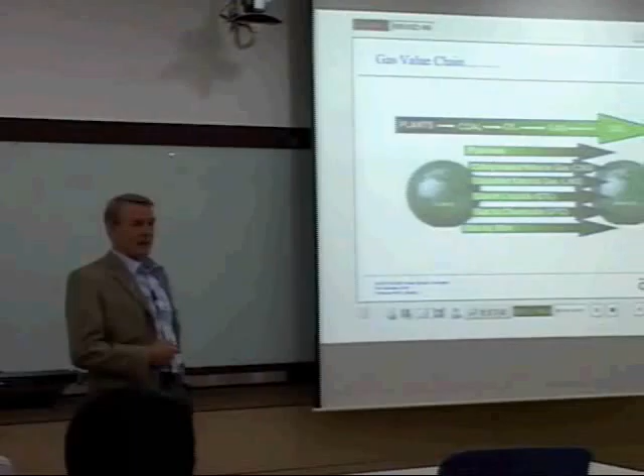the origin of natural gas is plants millions and millions of years ago, which through time and pressure and heat typically would be converted from organic material to coal, to oil, and then gas. And of course, when we use coal, oil, or gas, we'll also produce CO2, which one might say goes back into a cycle with the plants. But of course, the problem is that we produce much more CO2 than what goes into the natural cycle. So that's what we are worried about when it comes to climate.

So there is a supply. There are some wells where one can harvest the natural gas. Then one can transport by pipelines. We can transport in long distances also by compressed natural gas, simply pressurize it. But typically, if you just pressurize at ambient temperature, it will still be a gas, but it can have, let's say, rather high density anyway. Then, of course, a much more used method is to liquefy it by cooling. That's what we call liquefied natural gas.

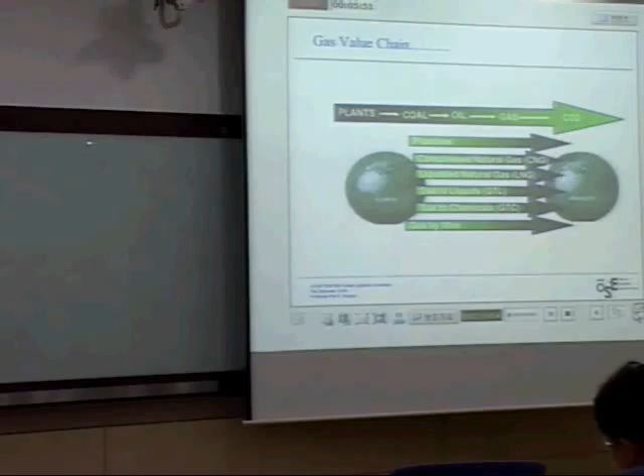Pardon me? Gas to liquids. You can, for instance, make diesel from natural gas, and we'll get a little bit into that. And they're different. You can make methanol from natural gas, plus many other things. It's a very valuable resource. So it's much more valuable than just using the heat energy.

So here, and in one way, it's listed first here because we haven't added much value, but if we take the gas as it is and burn it, for instance, for heating, we need to heat our houses, then of course we utilize that gas directly. So that's what's called gas to flare.

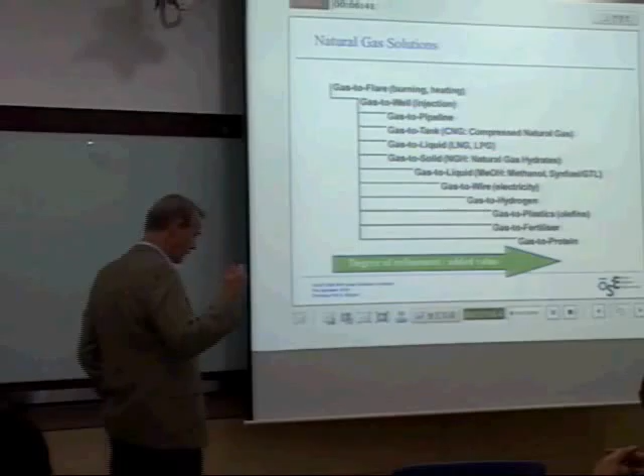You may also think of having seen pictures from countries where they primarily produce oil, and you may see these towers with a big burning flame on top, and that's what's called flaring. And in many countries now that is not allowed because it's a real waste of energy, right? But of course, if there's no way of dealing with the gas at the site, where, let's say, the main production is oil, but when you pump up the oil, there's also gas coming up, then some places they do flare it, they burn it.

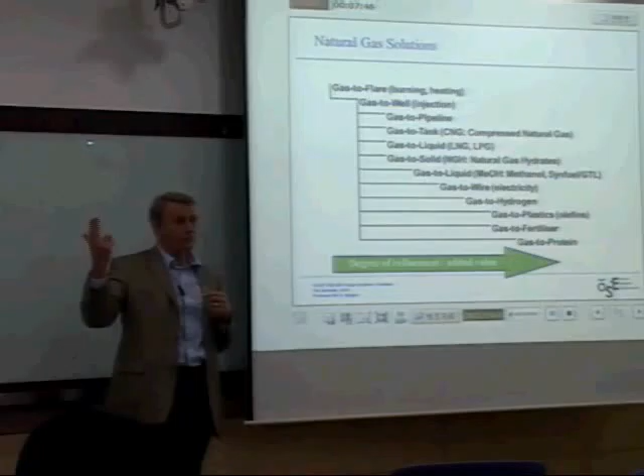Also at offshore platforms you can see that they have a flare, but that is for safety reasons. If for some reason a too high pressure would build up in the processing system, for safety reasons, one would flare it, burn it, right? But it's a waste of energy.

Also, gas to well. In some cases you have a production schedule for a well. Let's say you have both oil and gas in the reservoir. Very often, you'll find a layer of oil, and on top of it, there's a layer of gas. But the problem is, and let's say this is the surface or the sea bottom, if you take out the gas first, then you lose the pressure that you need for the oil, right? So they would like to extract the oil first,

but you may get gas coming up through the pipeline, and you are afraid of losing the pressure for the oil, and therefore the gas is separated out and then put back in the reservoir. But normally, after some years, one would like to produce the gas. So, in one way, it has a value to maintain the pressure in the reservoir. And that's particularly when you have both oil and gas.

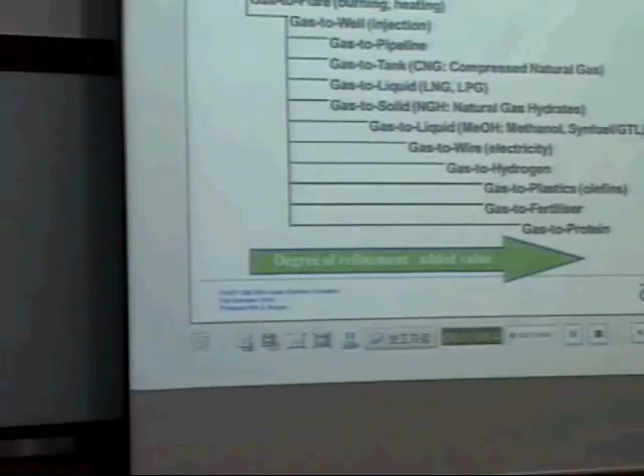So CNG is at ambient temperature. It is at natural temperature, but it's compressed. So of course, if you're going to transport it, you would like to transport as much as possible, and the amount you transport is dependent on how much pressure you have. So, for instance, you may want to transport natural gas by compressing it to 200 bars.

And you need a lot of steel to do that, to have huge volumes of gas pressurized to 200 bars. Gas to liquids, liquid natural gas, and of course also the heavy components of natural gas, butane or propane. Gas to solids, natural gas hydrates. What's a hydrate?

Hydro, water, right? So you have a method of mixing water and gas, and then you can get the gas out again by heating the hydrates. In nature, there are natural hydrates as well in the sea at very, very great depths of water. There's a lot of interest these days in the natural hydrates. Maybe that could be a source for energy in the future. But we can also make it. We can make a hydrate.

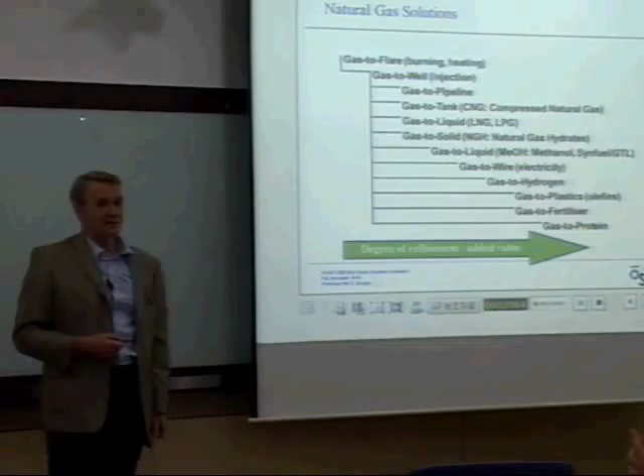So with modern chemistry, you can sort of split the molecules, take them apart, and then put them into different new configurations. Of course, there's an energy part of that equation, and it's not always very smart to do so, but you have a lot of flexibility with modern chemistry in making new things. And of course, carbon, oxygen, and hydrogen are major components in these products. So putting these atoms together in various ways, we can make different products.

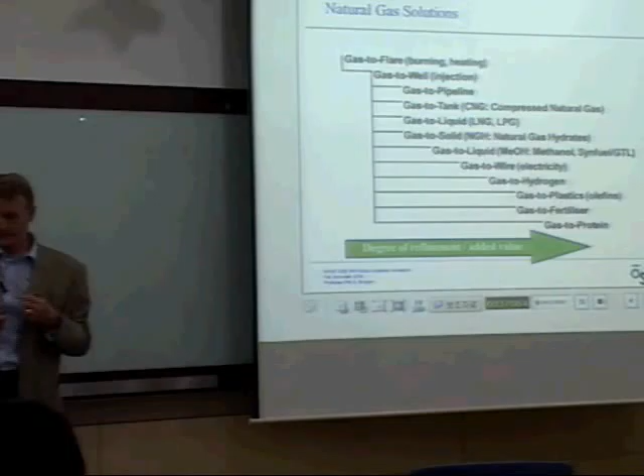So for instance, if you have natural gas coming in from a well, you can make methanol, you can make hydrogen, you can make synthetic gas and get some CO2 that you should take care of. You can get ammonia, also called azane, NH3. And then we're talking about this link into fertilizers, right? Nitrogen compounds.

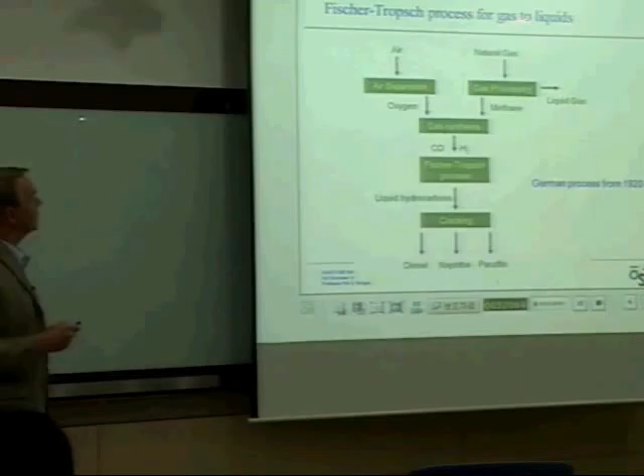So let's just take the gas to liquids. What's the advantage of transforming a gas into a liquid? It's easy to transport, right? You just put it in a bucket. No pressure, no cooling, and that's what we call fuels. So we would like to have it in liquid form. Unfortunately, to get it into the liquid form, we need to add energy.

But for instance, during the Second World War, Germany had a lack of fuel for their operations, and they made a lot of diesel and fuel for their war machinery, starting with coal, because Germany had a lot of coal but didn't have any oil or gas. But one can use coal, or one can use gas.

And natural gas very often is about 80% methane, right? You know what methane is? It's a high hydrogen fuel. It's a low carbon fuel, right? CH4. Okay? So you have a natural gas with different chemical components, and then you sort out the heavy parts, like butane and propane and that sort of thing, and the methane, the lightest component.

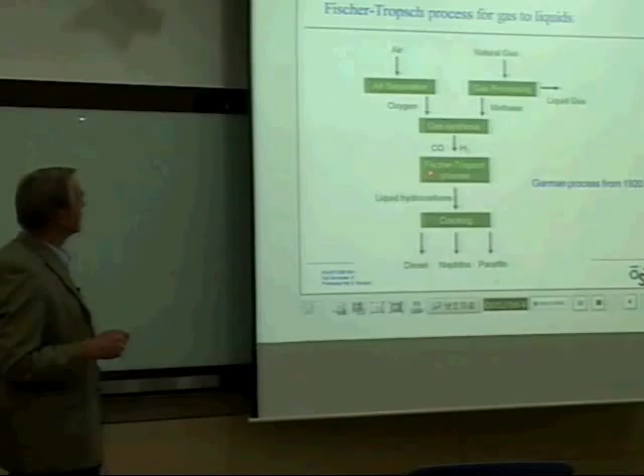You get into this gas process where you get oxygen from air, for instance, by, what do you call it, electrolysis, and then you do a synthesis and get hydrogen and carbon monoxide, and what's called the Fischer-Tropsch process, which is a German process from the 1920s. You can make liquid hydrocarbons, diesel, naphtha, paraffin.

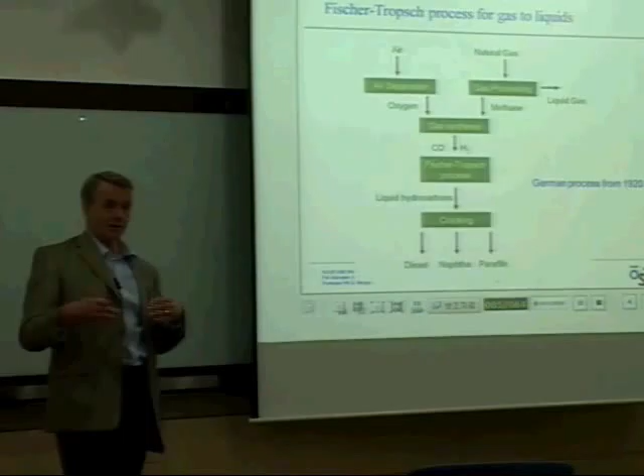And that is one source. But as I said, you need to add energy. And normally, it's maybe better to use the natural gas in other ways, but this is certainly a possibility. Let's think in the future, for instance, if we ran out of oil but still had gas. Well, we would like to have fuel for our cars and other purposes. Then we could make diesel this way. And it is being done, particularly in situations of crisis.

Okay, so that's some of the background. Now we would like to talk about marine transportation. And we already have covered subsea pipelines, right? Then we have compressed natural gas, we have liquid natural gas, we have gas to liquids.

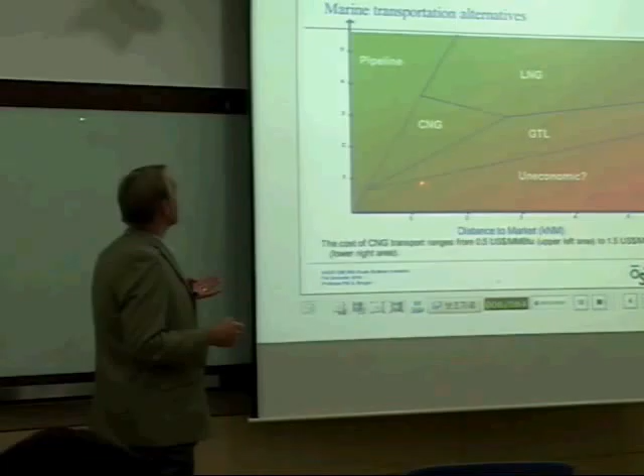And distance and cost per unit is drawn here, and you see if the market distance is very long, then there are certain, it's very... I'm just wondering now, this axis, the cost of CNG transport.

Okay, well, it's more the investment cost here that goes here. So if the investment cost is rather high, and then of course also the added cost of distance, if that is also high. For instance, a pipeline is typically proportional to the distance you want to transport. So the pipeline becomes too expensive if the distance to the market is too long.

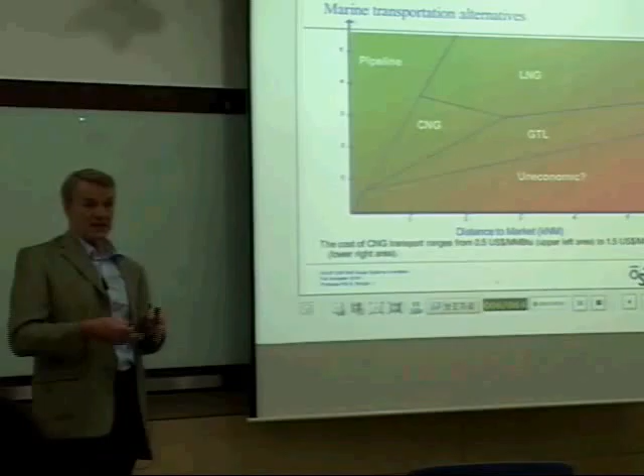Whereas LNG, the cost you put into the LNG is primarily in the chemical processing, the cooling. It doesn't really matter how far that ship is going, because the ship transportation is very cheap, right? But there is a basic investment which is rather costly, so it doesn't make sense to do an LNG transformation if the distance is short. It's only when the distance is long that LNG is competitive.

But if you have a rather short distance, an alternative to pipeline could also be to compress the gas, because compressing is not quite as expensive as liquefying the gas. But the transport per length is more expensive with CNG.

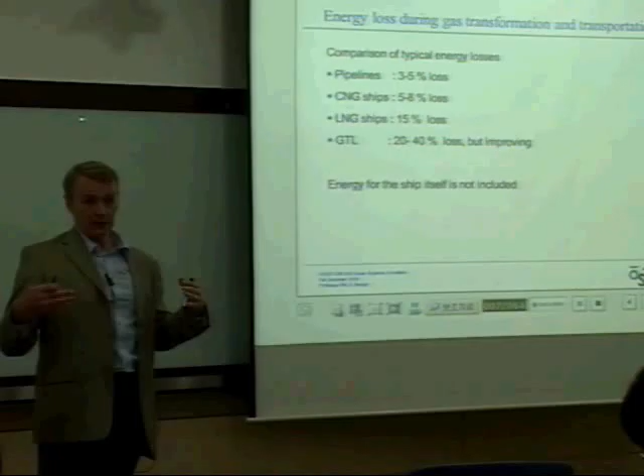And also when you think about the energy loss, the energy cost of transporting in a pipeline has to do with the friction in the pipeline, right? You have to add pressure to get the gas through, and the speed depends on the pressure difference at the inflow and the outflow point. So you need energy to overcome the resistance, the friction in the tube. So if you have a very long pipeline, the loss will be higher than for a short pipeline.

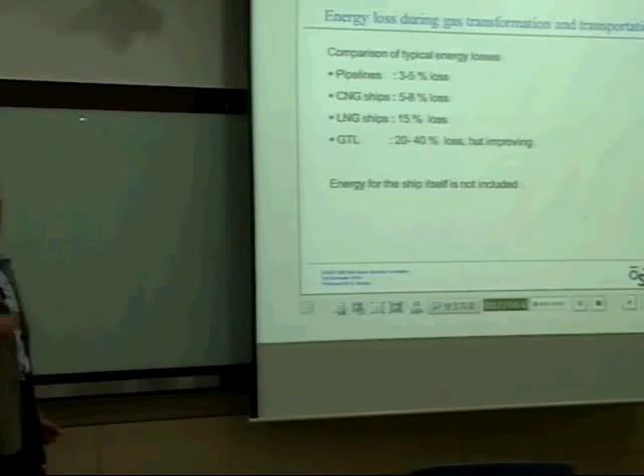With CNG, the pressurization also implies you have to add energy, right? And you can say that about 5 to 8% of the energy content in the gas is lost by having to add this energy. And for LNG, the cooling is even more expensive. Then the cost is about 15% in terms of energy. You have to use more energy to cool it than to pressurize.

And gas to liquids, that is very demanding when it comes to these chemical processes, where you may have to have electrolysis and you may have to add additional energy. So one is talking about 20, 30, 40%. So that is the process cost in terms of energy.

So we have gas production at the well, liquefaction, we have shipping. When you come with the LNG ship, of course you have to heat up the liquid gas in order to put it into pipelines and transport it to the consumer or to the industry that's going to use the gas. Normally that energy is taken from the sea, so it's not a very costly energy. Typically these regasification terminals, and you have several of them in Korea, take the energy from the sea that is needed to heat up the gas.

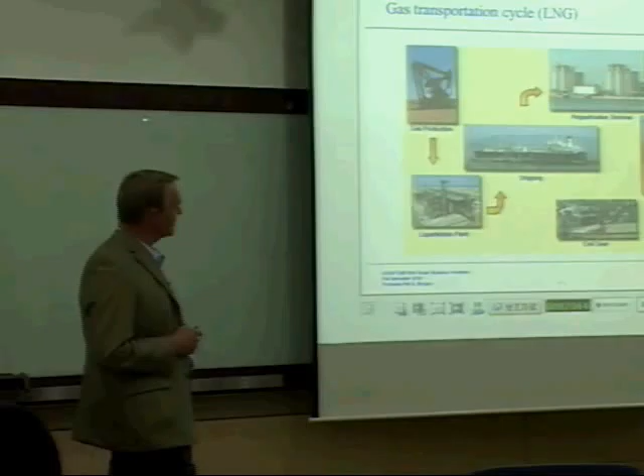But do you see some strange things in this picture? Something that is not really right. I'll start here. This is an oil pump, isn't it? Right? So you have to be a little bit critical. I don't think this is a gas pipeline from a regasification terminal either. It looks like it's from a certain field. But anyway.

I won't go too much into this phase diagram for natural gas, but you can go between liquid and gas, to gas, and of course a pure liquid. And if you have atmospheric pressure, then you have to cool it a lot, to minus 162 degrees or colder, in order to make it liquid. So 162, 163, in that range is where methane, which is the lightest component of natural gas, becomes a liquid.

And when the gas is at minus 162, it's a liquid at the boiling point, right? It's really a boiling point. We think of water, right? When it goes from water to steam, that's at the boiling point. But liquid natural gas is at the boiling point at minus 162. And the shifting between the liquid form and the gas form is very close.

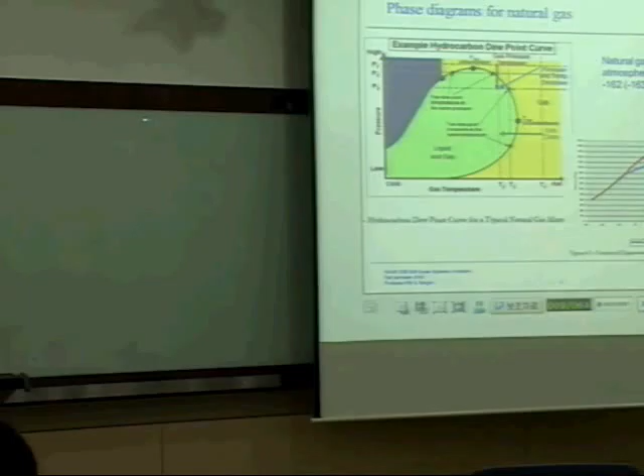And of course, in an LNG tank, you have both a liquid, and above the liquid you have an area where you have the gas form of the natural gas. But that gas, which is also around minus 162, is a very heavy gas. Very heavy, relatively speaking.

So when you get the gas from, it says transportation here, I would say the pipeline from the well, then you remove the heavy components, you remove CO2 that often comes along, you remove water, and you also remove other compounds that may come along, like mercury, certainly, and sulfur, hydrogen sulfide components. You don't want those in the transportation system.

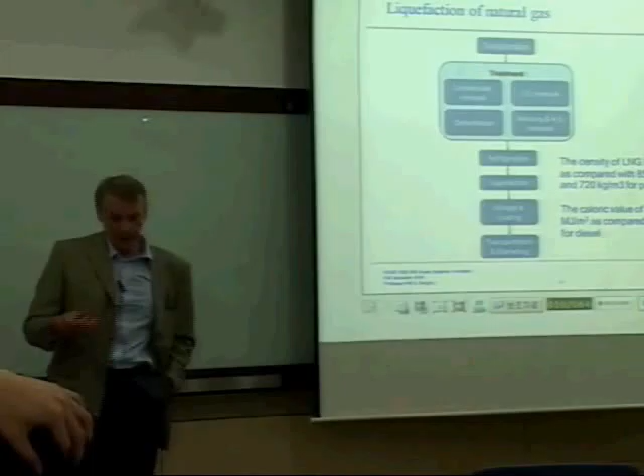So that kind of cleaning has to be done for the gas before it's refrigerated and thereby becomes a liquid, and you need storage, and then you get it onto the ship and transport it to where you want to go.

And you see, the density of LNG is less than half the weight of water, right? So it's really a light cargo. So what you would like to have on an LNG ship is huge tanks. You don't want to waste space because your cargo is light, right? So tank efficiency is important. Okay?

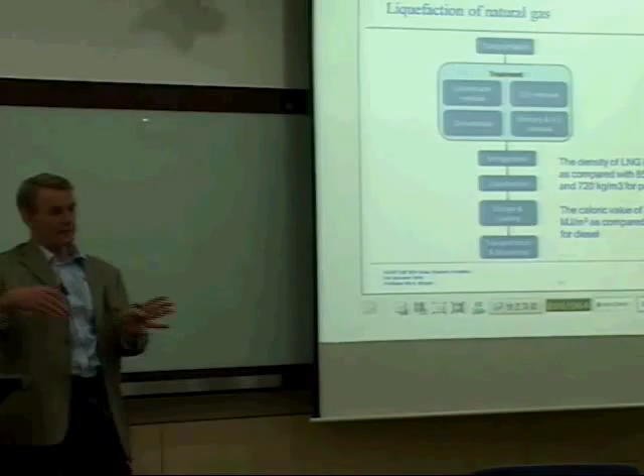So if you compare with diesel, you see it's much lighter. And also the caloric value, the burning value of LNG, when it comes to how much energy you have per cubic meter, that is, how much energy do you transport on a 200,000 cubic meter storage on the ship? Well, it's less energy if you have LNG compared with diesel or oil, other types of fuel, right?

But anyway, gas transport is very important, and gas is a much cleaner fuel than, for instance, crude oil, right? So there are many reasons for doing exactly that. These are just a repetition about the market, how it's now developing around the Pacific Basin, the LNG demand, and then the Atlantic Basin, and also a lot of growth there.

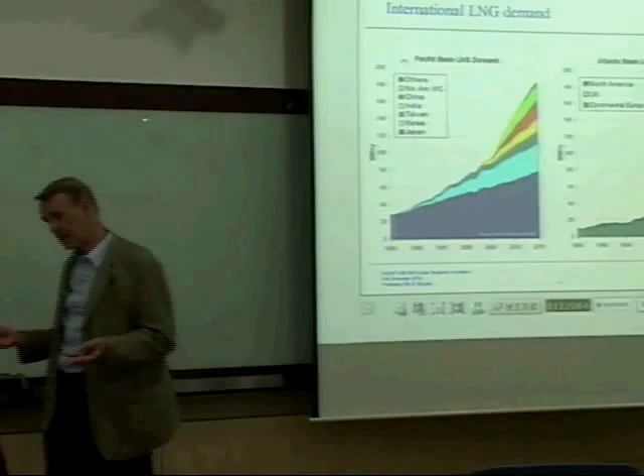But as I mentioned, there is one uncertainty factor these days, and that is what's called the shale gas, right? What the Americans are doing with the shale gas, which they have a lot of, which is not a really good source because the process of getting the shale gas out of the ground is polluting. But for strategic reasons, and that is the United States' energy dependence from importing energy, right? That is a problem for that country. That's why they're pushing this shale gas. And the market is a little bit nervous about this development. But anyway, the gas market is certainly increasing, and increasing rather rapidly.

Of course, what is a little bit uncertain is if these older ships will be phased out when they are 30 years. They are probably a little bit less efficient in many ways, but the investment cost of a new LNG ship is very high. Depending on the size, we could talk about $500 million. They can be very expensive, these LNG ships. So it's a matter of economy as well as safety. And also economy of scale we talked about, and now the focus is on the big stuff, the large tanks, and how can they be made.

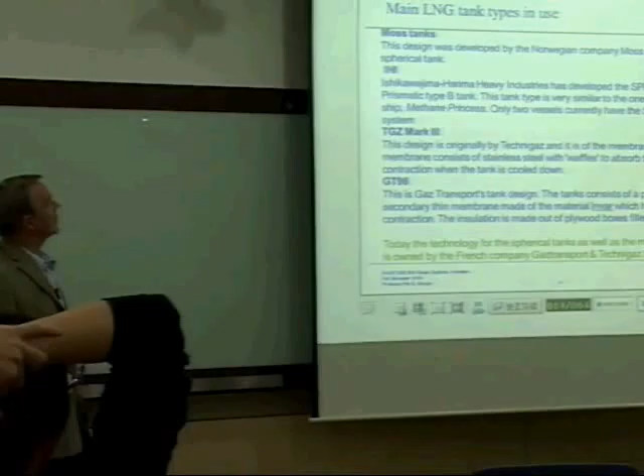So we'll spend some time now talking about the main types of tanks for LNG. And the LNG history goes back to the 60s, I think the late 50s. So it's a pretty long history in one way. But the first tanks that were built on a large scale, those were the spherical tanks, a design by Moss Marine in Norway. So about 50% of all the LNG ships in the world are with these types of spherical tanks, and we'll look into how they are designed.

Then there is a Japanese, I won't pronounce it, but IHI. So they have a self-supporting prismatic tank, and we'll talk about different tank shapes. A prismatic tank, it's like a box tank. And a box is more efficient than a sphere when it comes to utilizing volume, right? When you put spheres next to each other, you have a lot of space in between. Whereas if you have a box type structure, you can pack things much better together.

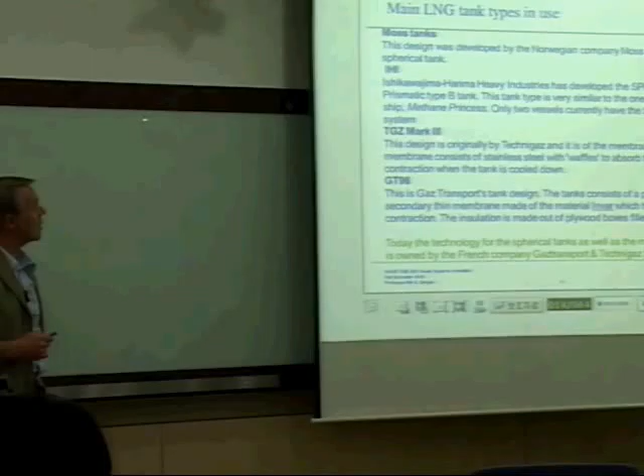But this hasn't been a very great success. So only 2 vessels have been built by this system, whereas here we are talking about dozens, probably more than 100. And here you have 2 types of membrane type tanks. One is called Technigaz Mark III. Now it's only referred to as Mark III.

And the other one is Gaz Transport, which is using another type of membrane tank, where the primary barrier is Invar, which is a metal which doesn't have any thermal expansion and contraction. Because you understand that temperature is a very difficult part of the design. When you cool something down nearly 200 degrees, from room temperature to minus 160 something, then of course you have a huge thermal contraction.

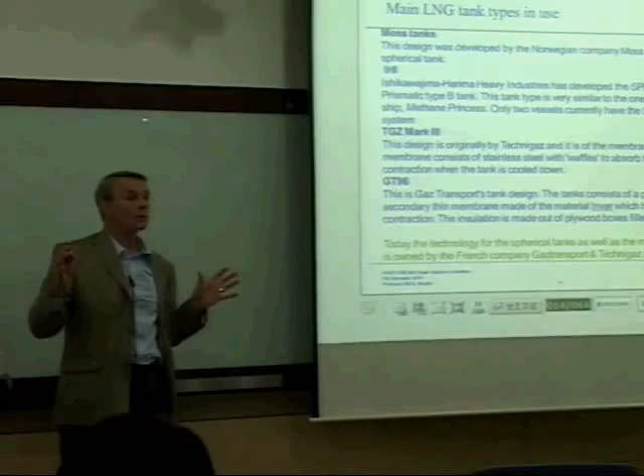And that is a real design challenge. And what has happened? Well, there's a company called Technigaz and Gaz Transport combined, GTT, that is controlling all this technology. Of course, many of the old patents have gone beyond their protection time, so they are open. But there's a lot of technology in addition to what is in the patents. So this company is more or less controlling all the LNG tank systems.

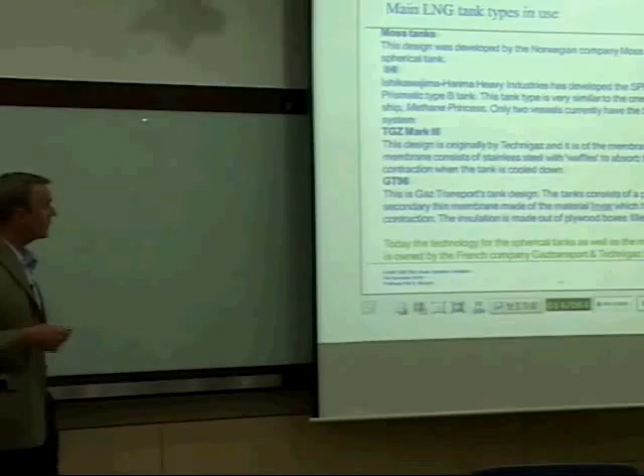And of course, I'm sure the Korean yards, as well as many other yards, are not very happy with this monopoly type situation. And I know Korean shipbuilding industry has been very much interested in developing a Korean concept for LNG. Right? So far, it has not happened, but I'm sure it can happen. And I think certainly there are alternatives that really could be competitive today to these existing systems. So this is quite an important topic.

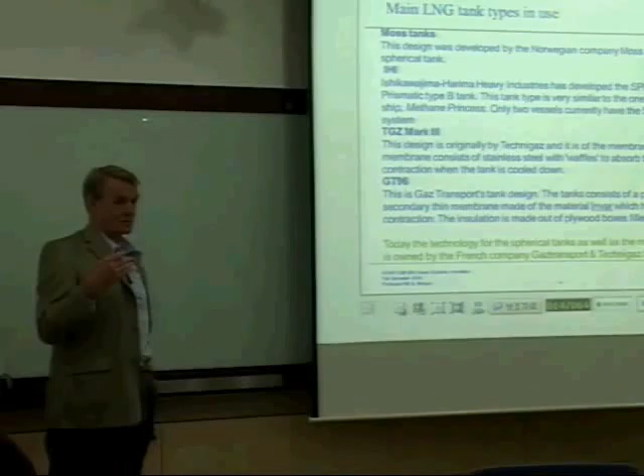And for instance, GTT, I've heard about what kind of fees they are taking for consulting. Fantastic prices they can charge for their technology. For one ship, the license may be in the order of $5 to $10 million just for getting access to the technology. So you can understand that the Korean shipyards are not too happy to have to pay so much for this technology. And additionally, possibly also consulting fees to the engineers from GTT.

But when the tank contracts, because it's getting cold, right? Then of course this has to deform. So you do get some thermal stresses in that structure.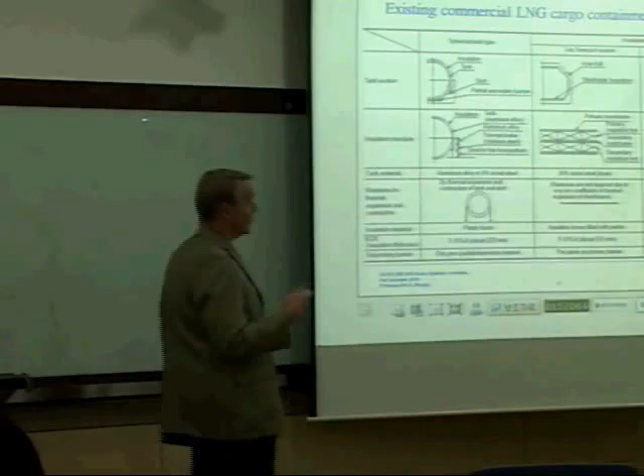And then you insulate the tank on the outside, and you have what is called a drip pan. If there is a crack in the tank, the liquid will flow down here and be collected in a drip pan here. But of course, by all means, you don't want that to happen. But there are gas detection systems that will discover if you have a crack and a leak in the tank. Okay? And the design criterion is leak before failure.

What does that mean? Well, if it should happen that you have a crack in the tank, that crack should not become brittle and you have a brittle failure, because then of course you'll have a catastrophe if the whole tank breaks down. But if the crack just opens and lets out a little bit of gas, you'll detect that there's a defect or a small crack in the structure. The rule is that the ship should be able to go to shore and unload the cargo before the crack becomes unstable.

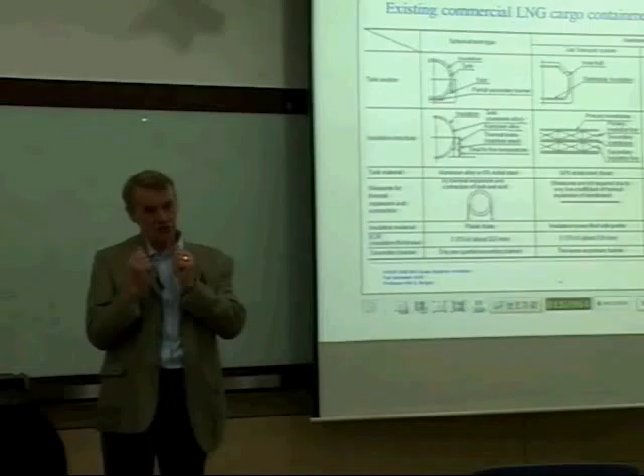You understand this? So leaking, of course, should not happen, but if it happens, the material has to be so tough that with the crack and with the liquid coming out, it still should not become a brittle fracture failure, right?

So important things to consider. I already mentioned this, structural integrity of the tanks, the failure mechanisms. You should not have brittle failure. You should not have a large crack opening. And if something is wrong, you have a strategy to ensure that you don't have a total failure before you can get to shore and have repairs.

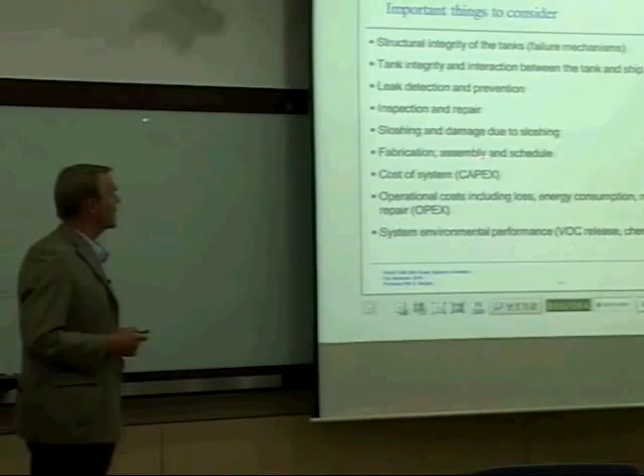Fabrication schedule. How long does it take to build such a ship? You know, the capital cost, if it's a ship that costs many hundreds of millions of dollars, what do you think it costs per day to have it without getting into operation? It's really scary if you start looking at that. And of course, the schedule, when you first start pouring money into building a ship, it's very important that you do that very quickly. And of course, that is a competitive advantage in many cases for Korea, because you are very efficient at manufacturing, right?

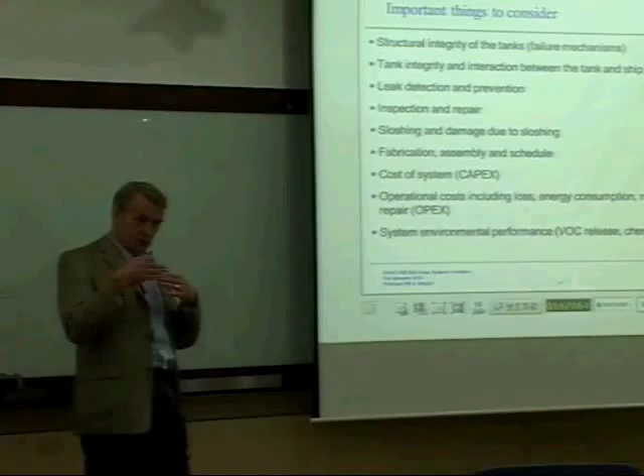So it's the cost and operational expenses, and also for the entire system, the environmental performance, which is becoming more and more important. So it's volatile organic compounds, volatile fumes coming out, but nowadays one is much more efficient and has systems for taking care of the vapor.

Remember that liquid natural gas is at the boiling point, and there's no active cooling system of the tanks themselves. The cooling is actually from vaporization, from fluid to gas. That's how the cooling takes place. And of course, when it goes from fluid to gas, it expands, and you cannot have this pressure building up inside the tank. So you have to release that. Well, nowadays, those fumes are cooled and put back into the tank after being condensed again. So you actually use energy to make it cold again, right?

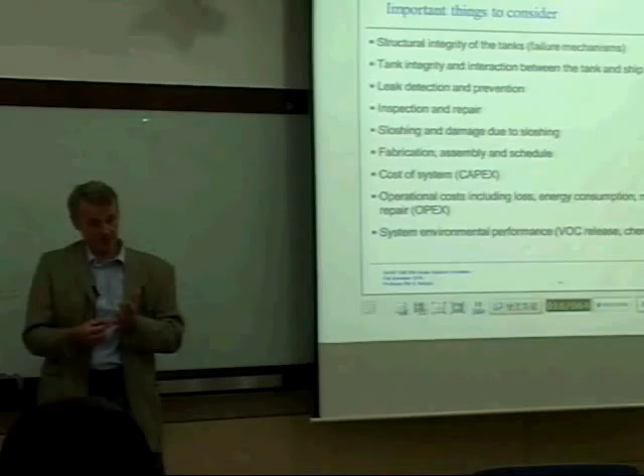Or in some cases, one can use the vaporized LNG as a part of the fuel for the ship. For instance, if you have a combined engine that can burn both LNG and diesel. Okay? But of course, you have to have some kind of agreement with the owner of the cargo. I mean, the ship owner cannot just steal the cargo. This has to be a part of the equation, right?

But you see, in one way, these spherical tanks don't fit very well into the ship hull. And the way the fees are decided when you go through the Suez Canal, this is an additional cost of having the spherical tanks. They have to pay much higher fees for going through the Suez Canal than the membrane tanks, and that's because of the volume above the sea.

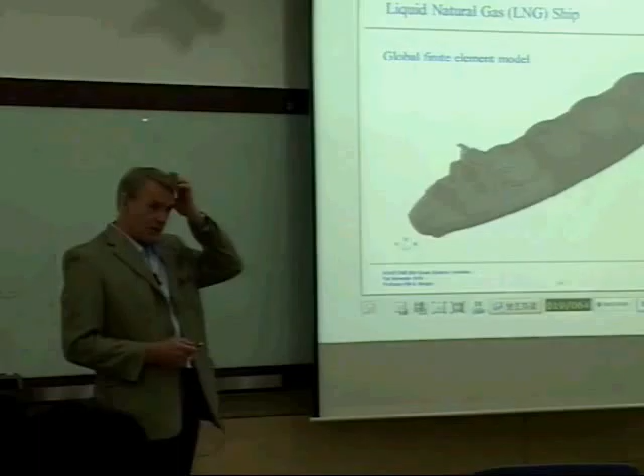Some of you are taking the finite element course. I'm just showing you an example of a real problem. I'm not sure how many real problems you see in that course, but this is an example of a finite element analysis of an LNG ship with this Moss spherical tank concept.

So when you start looking more into detail, you can see that a finite element model is built from what is often referred to as substructures or super elements, that is, elements consisting of many other elements, and you can build parts on different levels by putting together parts of a lower order, right? So, for instance, you have a detail here, a very important one, having to do with the support of the sphere, and you have a very detailed model here. You have the lower part, you have the upper part of the shell.

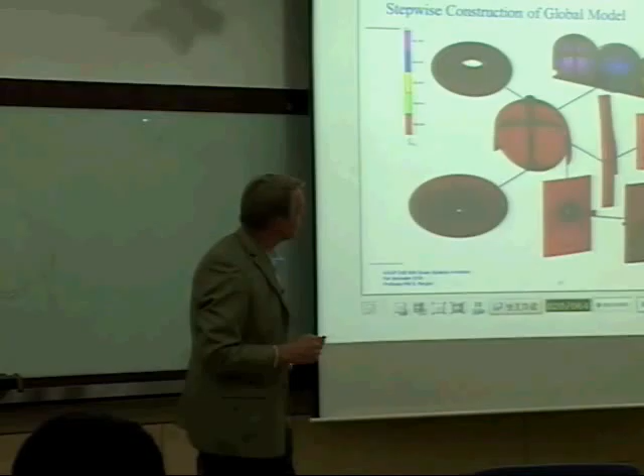Here's even more fine detail, where you use very, very small elements to get the stress concentration where you have the support, right? The elements may be millimeters. And then, on the other hand, you have a ship that is 200-300 meters long. So you see the complexity of this. You want to do detailed analysis at the local level because you're interested in stress concentrations and fracture. And at the same time, you want to look at the interaction between the ship and the tanks, right?

So it's a very complex analysis, but you can do a part solution and a condensation where you put together these elements, so you don't have to solve everything at the same time. But anyway, if you look at the number of finite elements in a model like this, we are talking about hundreds of thousands and millions of degrees of freedom. But this is a standard type of analysis that can be done today with large computers, but still, it's a standard analysis.

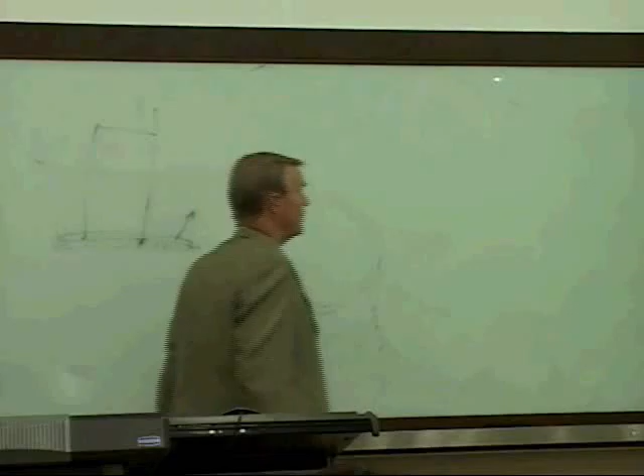So we have finished the spherical tanks. Now we are getting more into the membrane tanks. I have quite a few slides, and I'm not going to go through all the slides, but since I have it, I would like to give you some more background information. So some of these figures you can look at yourself and see if there's information there that would interest you.

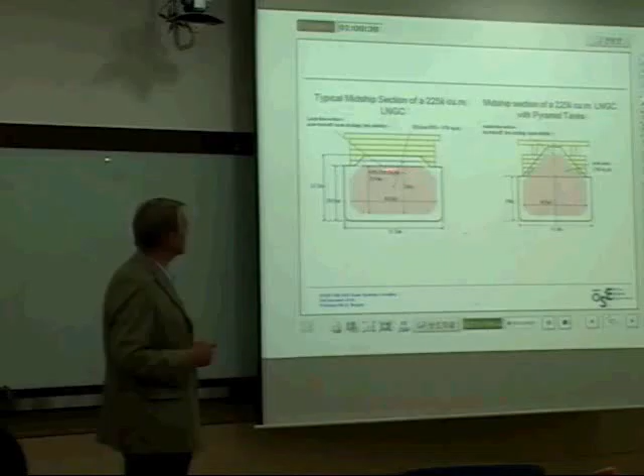Here is a large LNG ship. You see some typical sizes of these tanks. Total height 26 meters, width 44 meters. And of course these tanks don't go all the way out to the side. And why is that? Well, if you have a collision, you have to have maybe 4 meters, 5 meters as a safety zone, because you don't want that other ship to penetrate and open up the membrane tank on the inside, and that tank is not very strong, it's just a very thin material.

So, the cargo is light, and someone would like to have larger volumes, and these are some of the recent proposals to at least get a little bit more space on board by extending the tank like this. But of course you also build up higher pressures inside the tank, right?

And I would think that one other consequence is that you have to pay higher fees in the Suez Canal. Here are some of the figures that you can look at yourself.

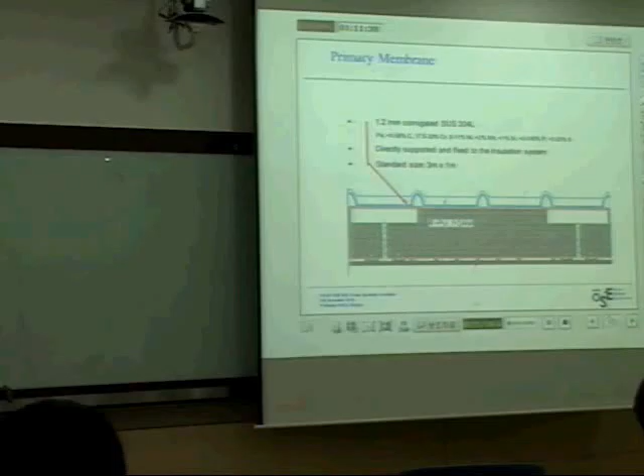So some of the details here with the secondary membrane and the corrugated top layer, right? It has to be corrugated in both directions because, of course, you have contraction in both directions. More details: the thermal insulation, glass fiber reinforced insulation, and what's called a triplex membrane, which is the secondary.

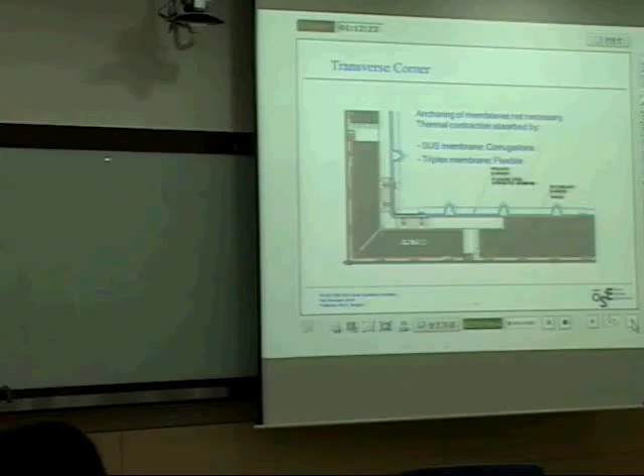And in between here you have gas detection systems. If you have a leak, the idea is that it's going to be detected before really getting through the second membrane, because if that happens, it's bad news. Some more detailing. How it's attached to the ship structure, bolted. So there's a lot of handwork, so to speak, here.

More details about the membrane. Welding. Lots of welding. Look at this. This is one of the corners. You see these welds? In rather critical areas. So I'm sure the people who do that welding have to do a lot of training.

And of course, after the tank has been made, it has to be tested, normally by applying some overpressure between the internal and the... Is it overpressure or under pressure? Maybe it's under pressure. I'm not sure. But anyway, there are some pressure tests to see if it's leaking or not.

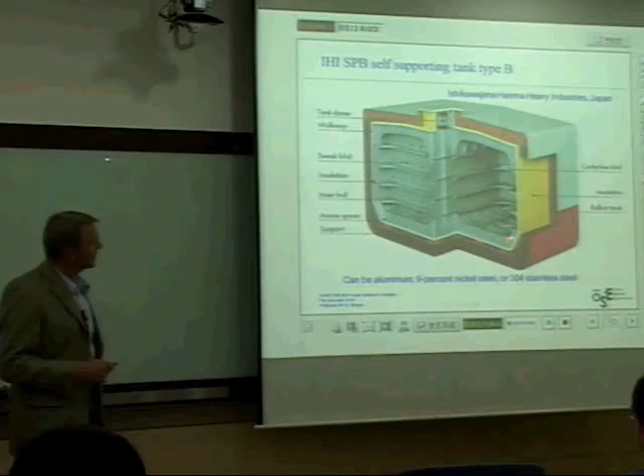This is the IHI tank, right? It has only a single barrier, and it's like almost any other ship tank, quite much welding work to do here, and rather heavy. Supported on blocks, and of course this contracts too. So it's self-supporting, really a separate tank from the ship structure. But of course the bottom of the ship structure will also move somewhat, so that kind of deformation has to be allowed for.

And there are some ships that have combined tank systems that can handle different types of gases. Ice-breaking LNG ships. See this one? Ice-breaking bow. We'll get more into this principle of ice-breaking later on, but it presses down the ice, fractures it, and pushes the ice to the sides. So in principle, this one can go through 1.5 meter thick ice. So not a very large LNG tanker, but still, 70,000 tons.

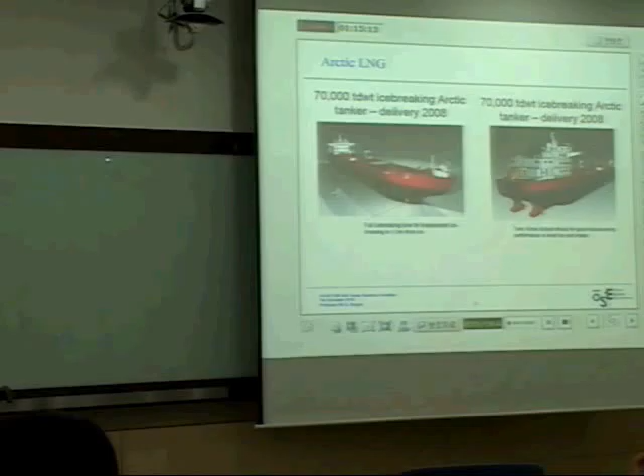And of course, some of these new gas fields are in Arctic areas. So is this safe? There have been a good deal of accidents, groundings, collisions, spills, engine fires, not major consequences. LNG is lighter than water, and natural gas is lighter than air. It will tend to evaporate into a cloud. So methane gas is lighter than air, so it will go up.

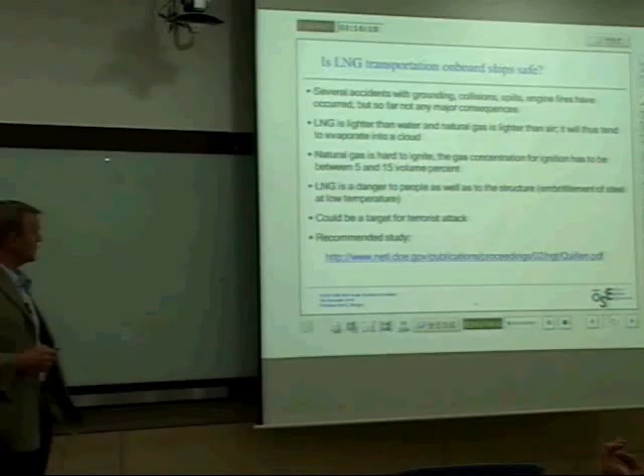But if it comes out as a liquid, that liquid will spread on the surface of the water, right? But it's not that easy to ignite. You have to have the right mix of air and natural gas in order to be able to ignite it, so that's between 5 and 15 volume percent. But it's dangerous to people, of course. You'll suffocate if you're only breathing methane, and it's terribly cold. And for the structure, I talked about the temperature problem and the brittle behavior at low temperatures.

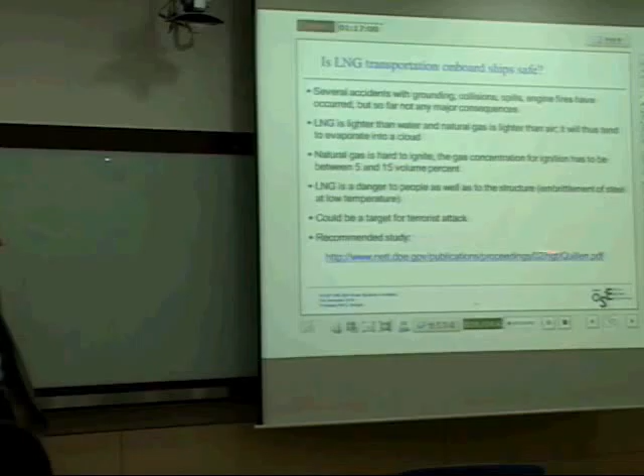A ship of this type could be a target for a terrorist attack. One saying is that an LNG ship is like a small atom bomb. Well, it's not that easy to make it blow up, fortunately. But we don't really know what will happen. But there are some studies of the safety and security relating to LNG ships, and there's a reference.

Land tanks, I'm not going to talk about land tanks, but they are, of course, important in connection with terminals, and in principle you could build such a tank also on a floating structure like a floating terminal, but the land type of tanks are normally very heavy. They are concrete outer shells, and then they have an inner tank which is made of 9% nickel steel. The same as you see on the ships.

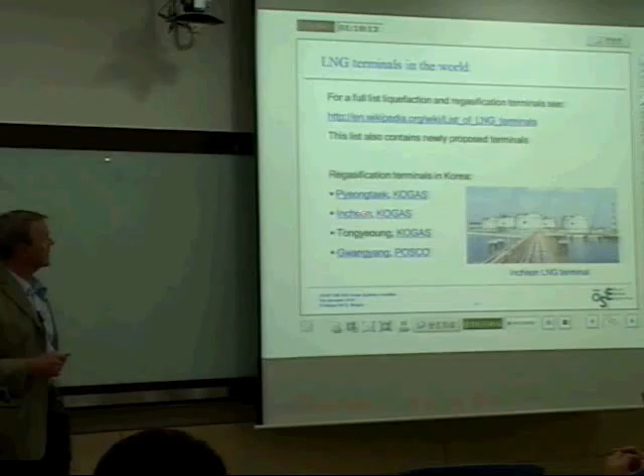So in Korea, of course, there are no liquefying terminals because you don't have any source of natural gas, but you have the regasification terminals. So there are some of them and some very large ones. I think at Incheon there are more than 20 different LNG tanks. Different sizes. Big. Big stuff.

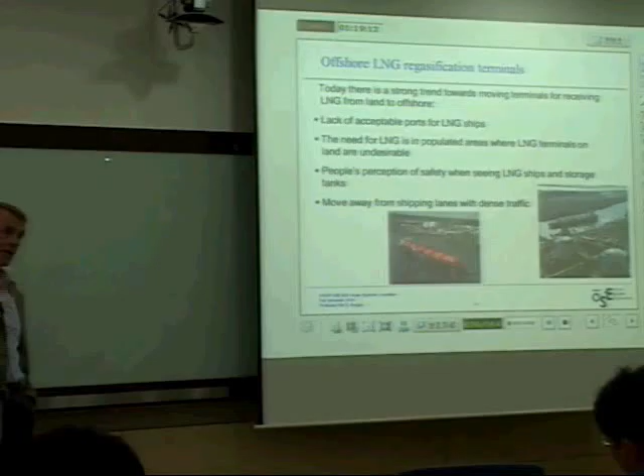So, again, the kind of technology we are interested in, which is the offshore floating plants, regasification plants, etc. That's the kind of technology that is coming more and more and becoming very crucial. So a floating LNG plant can be moved to almost any location. It typically can look like a process ship. No pipelines to shore needed.

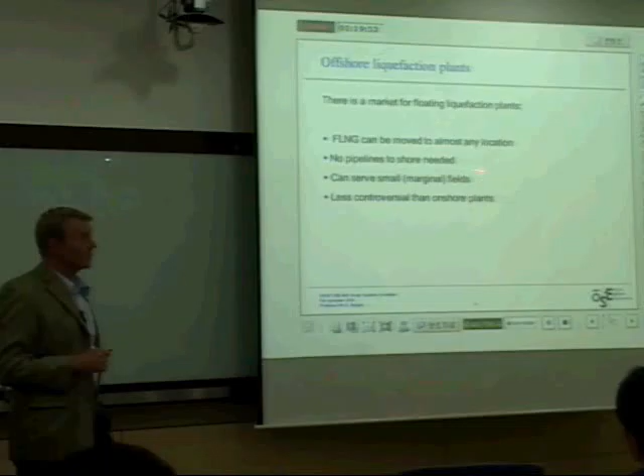Can serve smaller fields. Smaller fields that produce maybe 5 to 10 years. And when it's empty, you can move the ship to another place, right? So the investment cost can be shared by several fields, and it's less controversial than onshore plants. And that is particularly in the United States. There's been a lot of resistance against LNG terminals. For instance, the west coast of the United States needs a lot of gas, but they don't want the terminals. They would rather build terminals in Mexico and send it up to the United States.

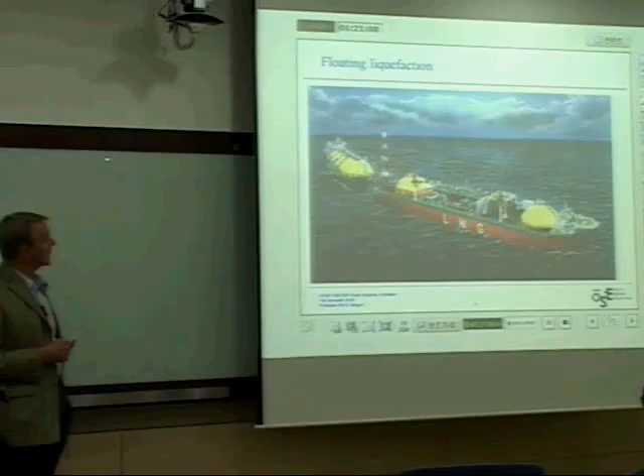But this is what it may look like. You have an LNG liquefaction plant, right? So there's a gas well down here, a resource offshore. There you have some tanks on board, and then this LNG ship comes in and gets filled with liquid natural gas. And here you see spherical tanks where the problem with partial filling is not significant, because the tank itself is much more robust, and sloshing is less of a problem in a tank like that, because the local buildup of pressures is much smaller. So different types of tanks could be used for such liquefaction terminals.

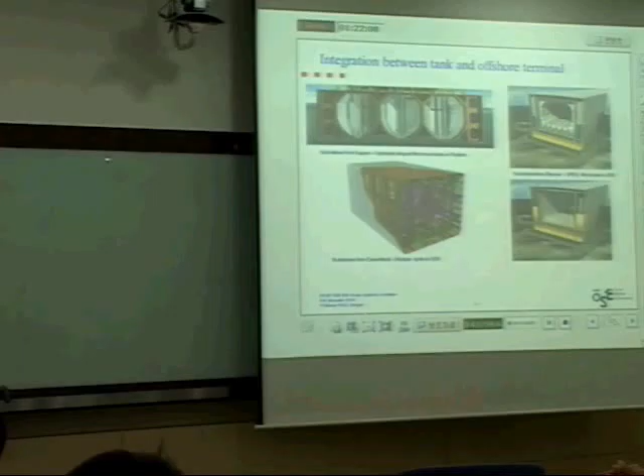Here you see some ideas. And of course, prismatic tanks have the advantage of being better integrated into the structure. The prismatic, the box-like form. And here's one concept that ExxonMobil worked on for many years and invested a lot of money into, and finally implemented in an offshore terminal in Italy in the Adriatic Sea, not far from Venice. And it was built in Spain. You see the size of it?

Designed by Aker Solutions. It has 2 tanks of 125,000 cubic meters. And it's the ExxonMobil tank concept. Designed by Skanska, a Swedish company, and fabricated by HHI. So these tanks were transported to Europe and installed in this concrete floater that was floated to location and set down on the sea bottom. Okay. So the water depth at that location was sufficient for very big ships to come into the terminal.

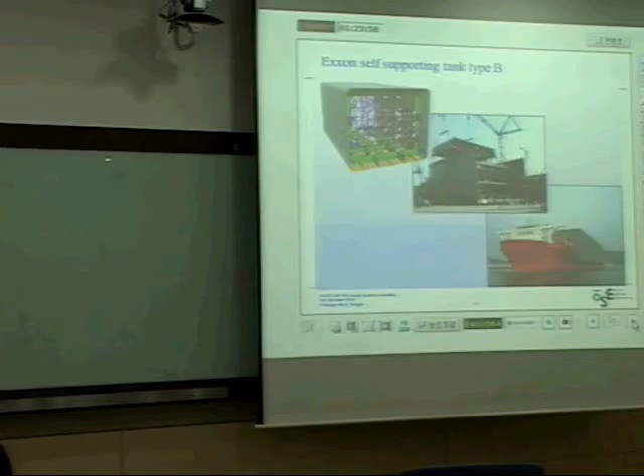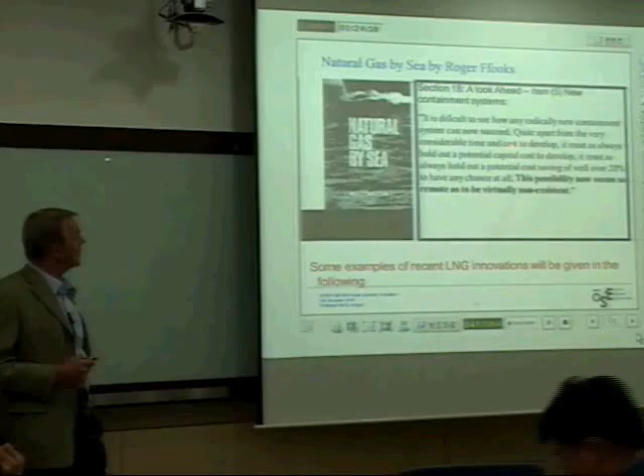There is an interesting book called Natural Gas by Sea. It's about the history of LNG transport. And it's written by a person by the name Roger Ffooks. I think he is Dutch, from the Netherlands. And one quote from this book that was written in the late 90s: it's difficult to see how any radically new containment system now can succeed. Quite apart from the very considerable time and cost to develop, it must, as always, hold out the potential of cost savings of well over 20% to have any chance at all. This possibility now seems so remote as to be virtually non-existent.

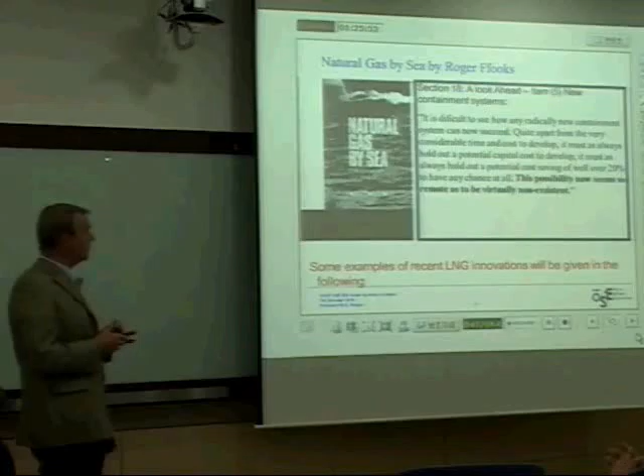Well, I think he was wrong. He had been working in that field and thought, well, this is as far as technology will come, what he has been involved in. But of course, there are new ideas coming up, and certainly a very great market pressure, market push to develop new technology which is price-wise competitive. But I've been involved in projects like this, and what is said here, in order for a new concept to be interesting, it should have a cost saving of at least 20%. So it has to be smart. It has to be smart technology in order to be able to succeed.

So I'll give you some examples of LNG innovations. And these are examples that are to a large extent based on my ideas and projects that I have been involved in. So I have some background for this.

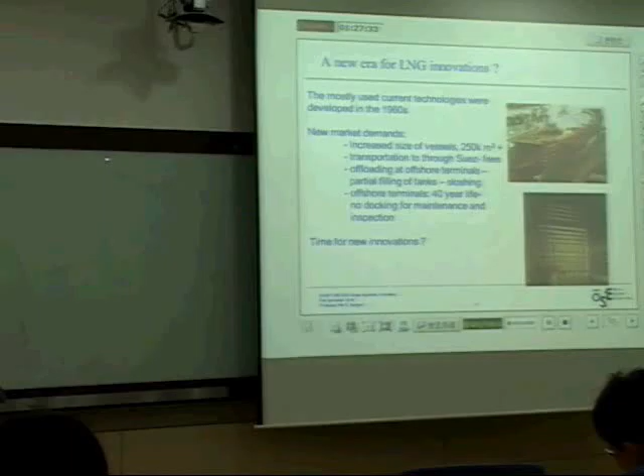Yeah. And sloshing is certainly a very important part of this. But the current technology has certainly weaknesses. There are lots of codes and regulations, and these regulations were established nearly 20 years ago. And they kind of are focused on technology that was existing 20 years ago and probably should have been written in a different way today.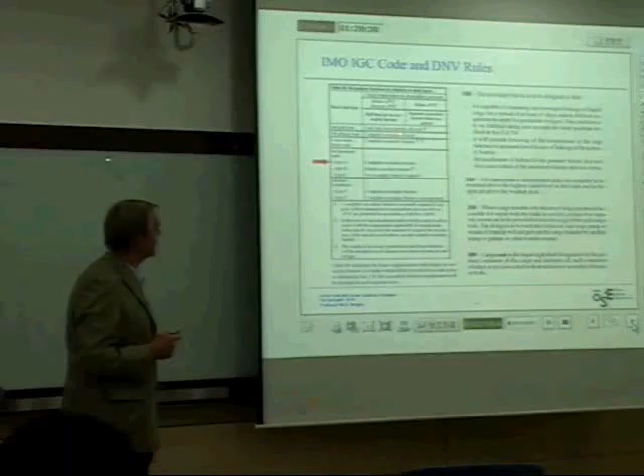But here you see, for instance, for membrane tanks, they should have a complete secondary barrier. And then there are independent tanks that are not relying on the ship structure, but they are separate tanks standing inside the ship structure, right? And there's a type A and a type B and a type C. So a type A has a complete secondary barrier, a type B has a partial secondary barrier, and type C

has no secondary barrier. And when you talk to oil and gas companies today, they say any new tank they want to get involved in, and I've been involved with BP and Shell in this connection, and Statoil, they say we want a type A. We want an independent tank that has two barriers. So how does one make that? That's the big question.

Something strange happened with the consistency of formats here, but anyway, we had what is called a joint industry project. There were 3 big oil companies involved: Statoil, BP, and Shell, and there were 2 shipping companies involved, and Aker Yards and Aker Solutions and DNV.

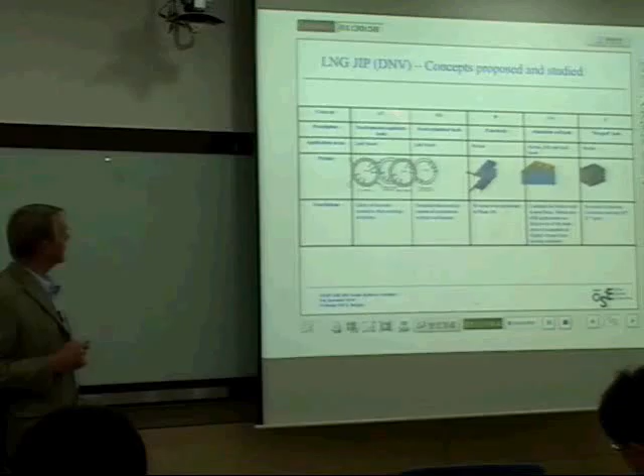So we had a series of concepts that we proposed: a sandwich tank, a semi-cylindrical tank, double barrier, panel tank, and what we call the cell tank, and then an integral tank that was really not considered too much. But anyway, we did quite extensive studies of this, and we did patenting of these 4 first ones. And we did, through 1 year study, various alternatives.

And in the end, here you see the idea of using lightweight concrete as insulation material, and I have 2 barriers. It's like a sandwich. You have a steel membrane on the inside. You have the core material of lightweight concrete, and then a steel barrier on the outside. So you have a lot of structural strength and integrity. So the insulation material in this case is a part of the structure. So that was one of the alternatives. And you see it's almost a prismatic tank.

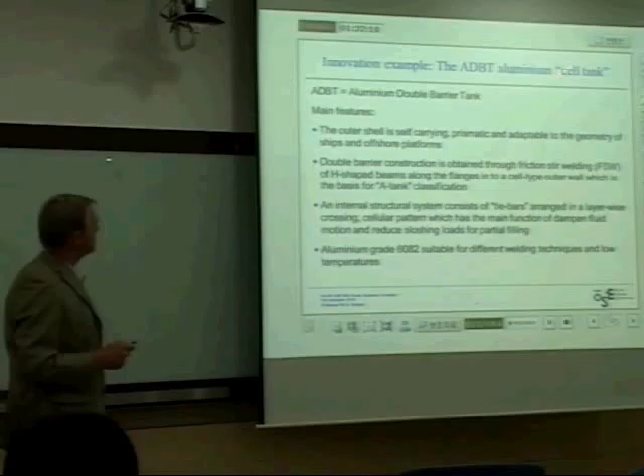But the one we ended up with after 1 year was the one that was called a cell tank. It was given the name ADBT. I don't know exactly why, but aluminum double barrier tank. So I'll show you some pictures of it, but it's a complete double barrier and made of aluminum. And aluminum is a very good material for low temperatures.

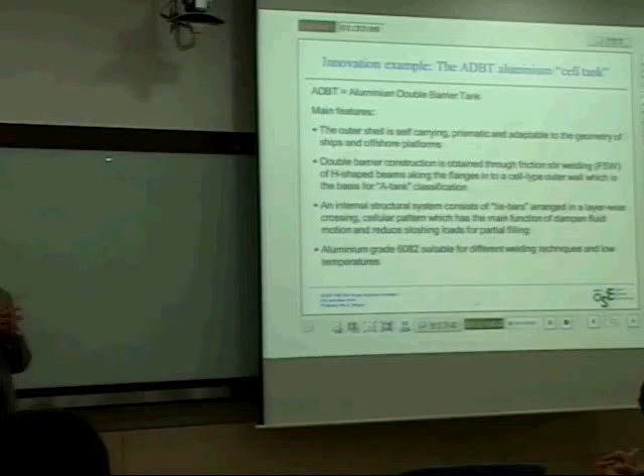And the walls are made of beams that are welded together. And inside there is a structural system that has 2 purposes. One is to hold the walls in place, and the other one is to prevent sloshing. So this is the particular grade of aluminum used for this tank, a type of aluminum which is strong and weldable and suitable for low temperatures.

So the wall elements are extruded H profiles of aluminum beams, and these are welded together, so you get a double wall by stacking these on top of each other. And inside you have cross-linking beams which hold the walls in place, and of course also have a strength when it comes to the tank moving in the sea, right?

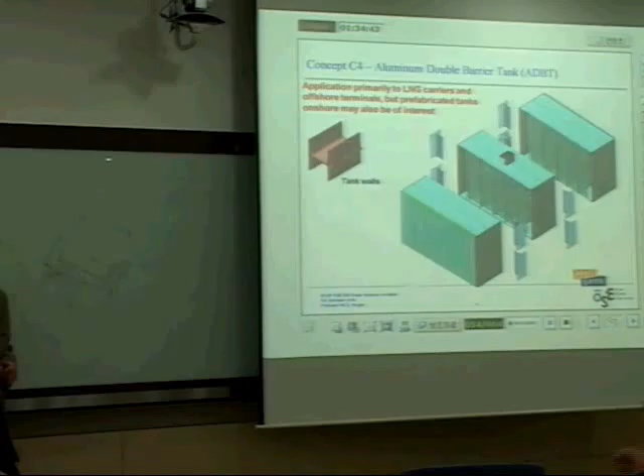And when you design the tank for a ship, you have to design it to be able to withstand 30 degrees roll. And that is a pretty serious loading condition. When the tank is on the ship, and this is 30 degrees, then of course the force component in this direction is 50% of the weight of the tank. Pretty serious stuff.

And also the tie-in of these internal beams, very important detail in order to avoid fatigue and cracking. I think we've found an excellent solution for that. Here you see another picture.

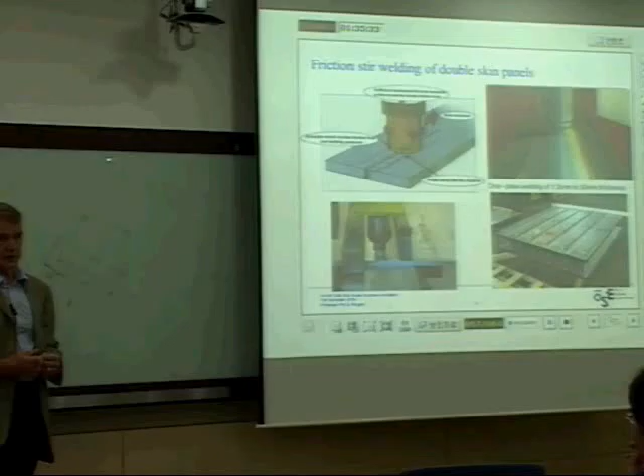And this method of friction stir welding is maybe not so well known in the shipping industry, but it is being used in construction industry for other purposes, and I think it's also used for car decks inside ships. So you see two aluminum plates put next to each other, and then there is almost like a drill on the surface that's rotating, and it has a pin that goes in this crack between the two plates.

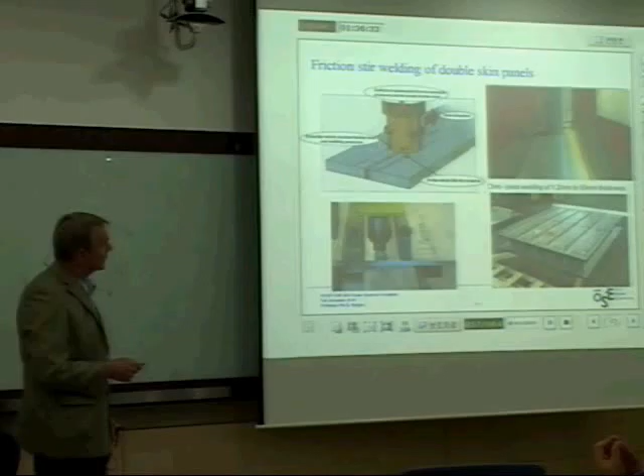And by rotating and having a pressure on it, this you see the result. You know, the material melts, but then of course hardens again, and the surface is completely smooth. And there's no welding material added. It's only the material of the plates that melts and fuse together. So here you can see where some of these beams have been welded together into a panel.

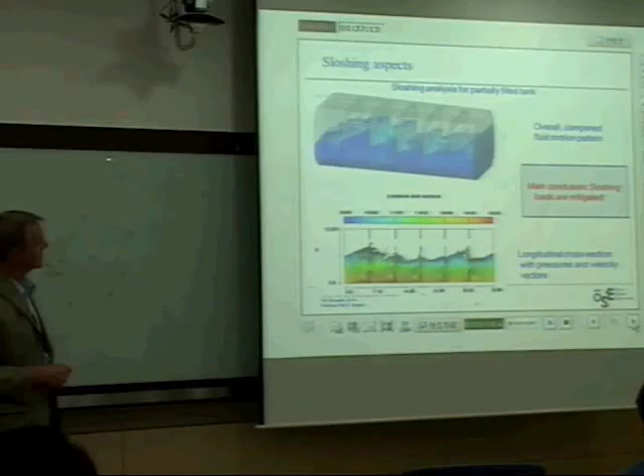And also modular construction of the entire tank. Sloshing analysis, and of course, because of these internal beams that are linked together like this, there's very little major sloshing, just, let's say, local sloshing in these chambers. So, thereby one can avoid building up very high sloshing dynamic pressures on the tank walls. But anyway, these tank walls are very sturdy, very strong, and can take quite a bit of pressure. But in reality, the sloshing problem is virtually eliminated.

And Aker did some analysis of different types of ships, and the concept is completely scalable. You know, you can make the tank as large as you want because it consists of cells that are equal. So it's just extended. It's more a matter of how practical it is to have a very large tank.

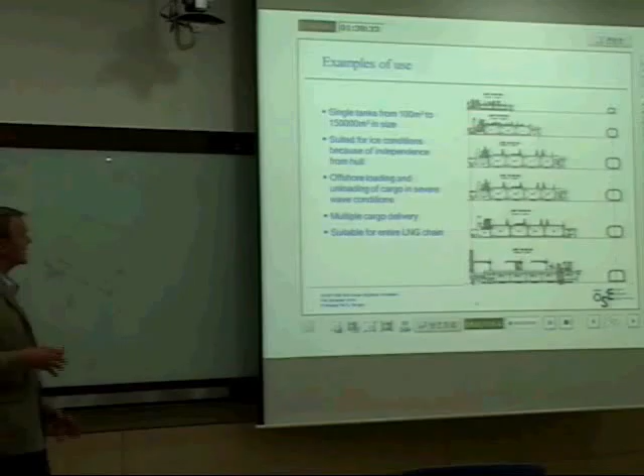But since it's an independent tank, you can have it, for instance, inside a ship for ice conditions where the ship hull may be deforming quite a bit, because it's a separate structure. You can have loading, unloading in severe weather conditions, and by having several tanks you can do partial delivery in one place, and it doesn't matter that the tanks are only partially filled when you go a stretch at sea.

And also what they found out about this concept is that the production time will be much faster because you have a complete parallel production of the tanks and the ship, and you can push the tanks inside the ship. Whereas if you think of a membrane tank, you have to build that membrane tank after you have built the ship. And of course that takes several months to do. So with the capital cost, this is a major cost saving.

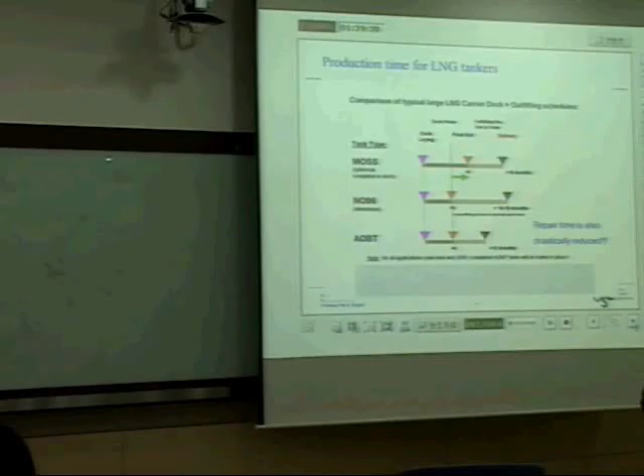So the advantages are: scalable, independent, box-like, all levels of filling, cheaper in production, shorter construction time, easier to repair, it's lighter, and strong in collisions, and it is approved as a tank type A, double barrier independent tank.

And this was a little bit back and forth because Aker Yards was sold to a large extent to STX, but this part of the technology was kept outside that deal, and there were some Russian companies getting involved in this, and during development they had some economical problems and their whole project collapsed. But Aker Solutions has now taken over the technology and they are developing this.

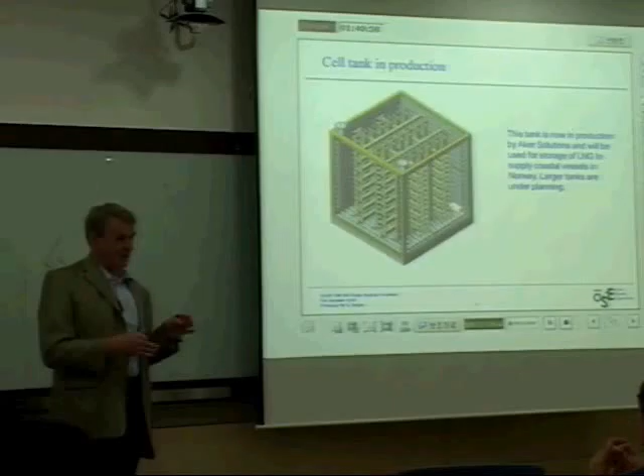And this is one of the smaller tanks; for startup they want to build a smaller tank. So that will be used along the Norwegian coast now to supply LNG to coastal vessels. And they are also planning much larger tanks, but they're going step by step. So they're saying they will be able to build single tanks of up to 150,000 cubic meters.

So that will be interesting to see, and for me, it was my original idea, to see if this really is going to happen. So I would think this kind of technology will be on license from Aker Solutions, and they are building more like terminals. They are not building ships, so there could be opportunities there, I would think. So that was the last slide.

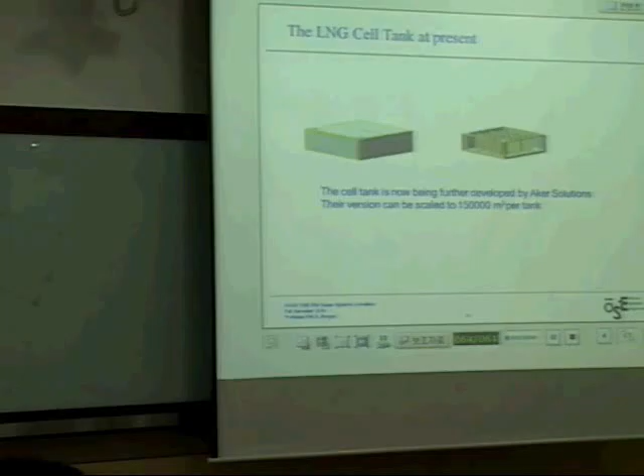I know there are other possibilities too for LNG tanks. Like I worked on one concept with a prefabricated box type which is more integrated with the ship hull, like a membrane tank. I think that concept could also be something for the future, but it's a different concept from this independent tank. So you have to notice the difference between an integral tank, which is sticking together with the external structure, and one which is independent and standing all by itself. Okay.